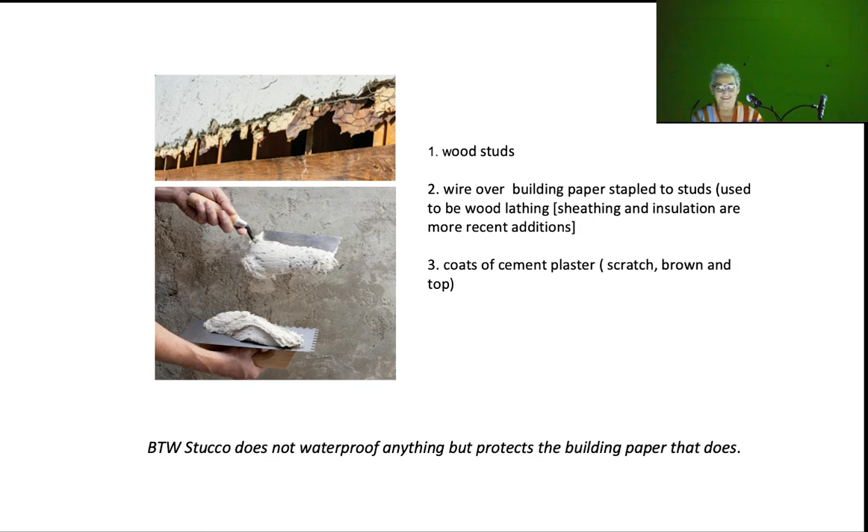Although we were very environmentally conscious and took flack for that, like most people back then, we were not linking building materials to climate change. We were thinking about sustainability in the broad sense, not carbon footprint. Truthfully, we took it for granted that a traditional material like stucco was okay, but we didn't really know.

So I am making up for that lack of research now because we can no longer ignore the impact of material choices. So here is a synopsis. Don't panic, it's not a treatise on stucco. So let's start with what's in it. Well, that I'll let you read. It's pretty exciting. You got it all?

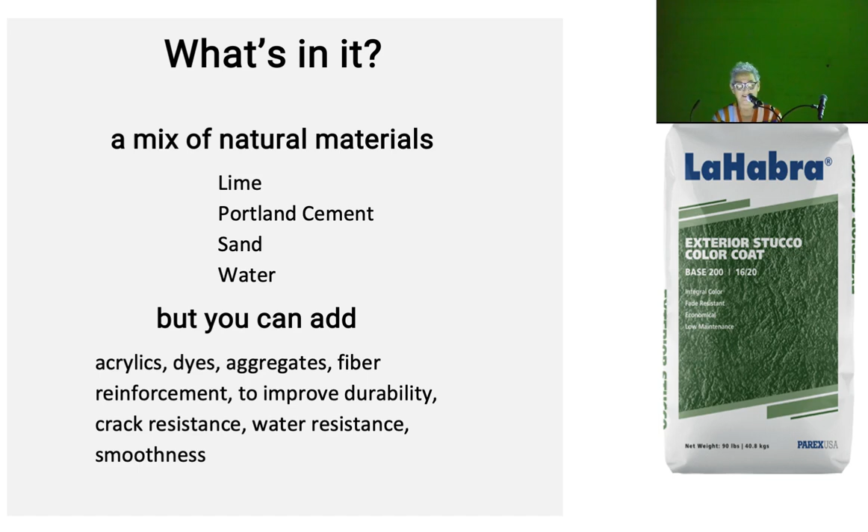I'm moving on. So what's the environmental scorecard? Because this is pretty important. It's climate appropriate. Now, don't forget, this is all coming from the thing that stucco kind of has a bad rap. I actually think stucco is okay. You know, stucco's our friend.

Breathable, high thermal mass, that's good for here. It's got a local manufacture, supply, and labor. It's easily repaired, resists solar degradation, and even has a fire resistance of 1 hour. It's got low embodied carbon relative to glass, vinyl, and metal, and is a very small percentage of the building's embodied carbon. It's disposable, reusable.

We need an environmental product declaration to know that. Is it healthy? We need an environmental product declaration to know that. In other words, we're at a point where we'll be learning more and more about materials, but we still don't know enough.

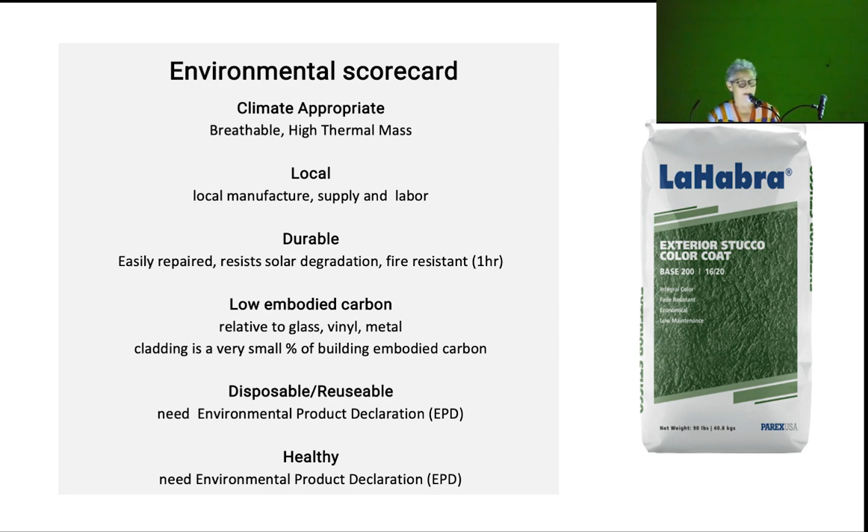And just if you want to know why we still use it so much, take a look at this chart. Stucco sand finish, and if you're into stucco like I am, there are different levels of finish, and they all cost something different, is $15 to $20 a square foot. If you work with any developer, they are very keen for you to stick to stucco whenever you can. If you look at buildings, you'll often see that there's some fancy material on the front and then there's stucco on the sides. It's this differential between even, let me get to cement board, $37 a square foot and 15 to 20 bucks a square foot.

So this would all make huge amount of sense, except that as a percentage of the construction cost, cladding is 8 to 12%. Mechanical electrical systems have been escalating. They're 25% of the construction cost. So we may be worrying about what we use on buildings without really understanding what their proportional impact is.

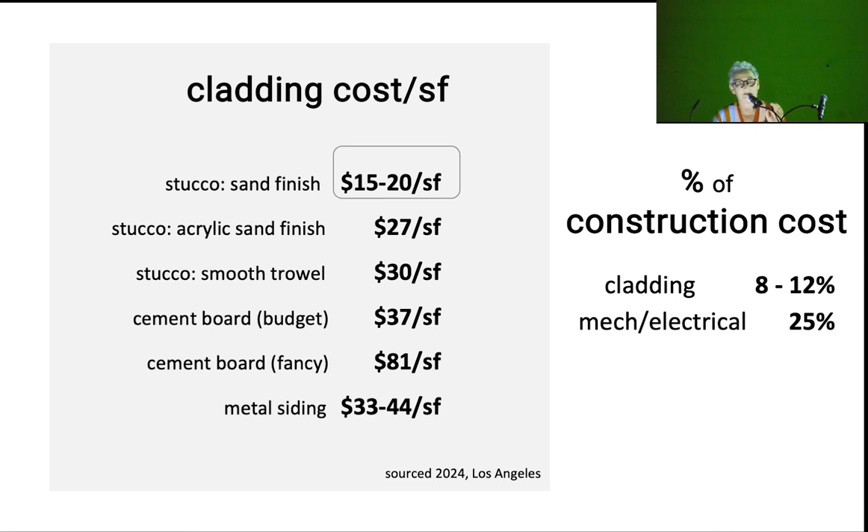These fantastic buildings hanging off the mountainside were by Neutra. I didn't know Beckett was involved in those platform houses, but he was. And then Charles Moore and Frank Gehry come along, and they take generic stucco-clad buildings in new directions.

Which brings me to the beginning of 40 plus years with stucco. As we mentioned, the work that came our way and that we gravitated to was for the most part very budget driven. We did small remodels, houses, affordable housing, and community projects. We ended up building a lot with stucco.

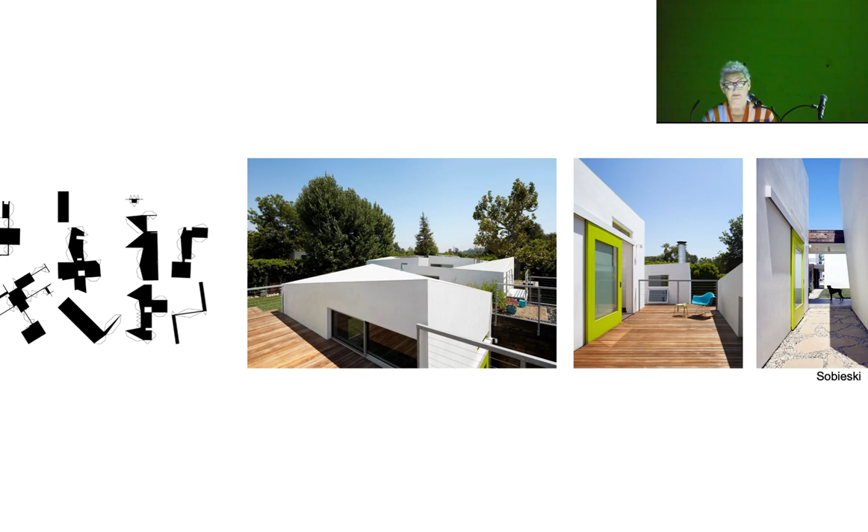So this one, the Sobieski house, is kind of a favorite one to think about with stucco because it applies the principle of thinness, as the diagram of the cutout box shows you, with the idea of plasticity. And in this case, although it was a budget project, we got to do the detail at the roof so that we could take the roof and connect it to the wall.

And then there's a whole group of buildings that started to look at how passive shade, which is something we care about because we worry about the performance of a building, could also create both amenity and shadow and pattern. So what you're looking at is the Arroyo, and these are clip-on metal screens. The Belmar Apartments...

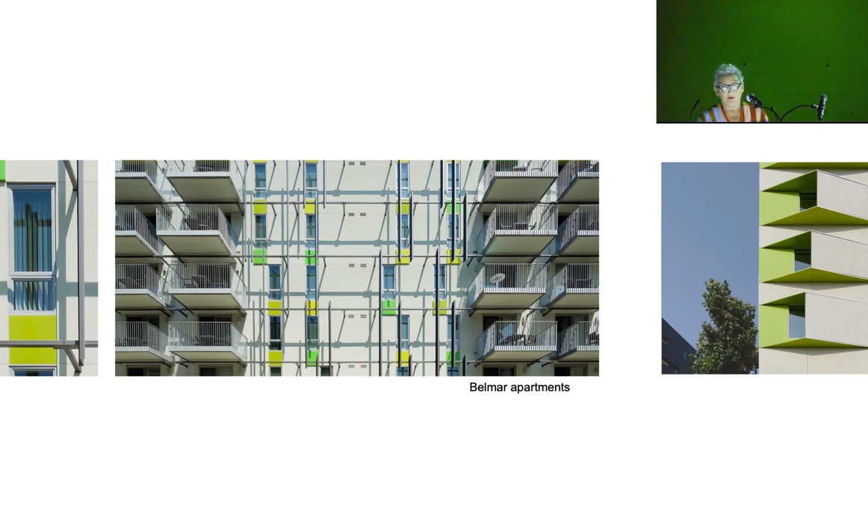Floor, where we started to combine the plasticity with the planes to get the things. I mean, it matters if you choose a material that has holes in it, as you see in the middle picture, the kind of shadow you get, versus one that has a solid panel, and what sort of shade you get from that.

So we'll move on to different topics, and the rest will be done by case study. So another material issue for us is building less. Reuse saves about 50 to 75% of embodied carbon over building new.

I guess just for a second, I want to say what in school you think of as constraints—like it's a cheap building material, or you can only do that much, or you have to worry about a detail or a joint—feels like a restriction on your freedom of thinking. And what happens when you get into the field is that's the stuff you get to actually play and reinvent with. It sounds counterintuitive, but sometimes thinking about how to do things cheaply and how they're built gives you more leverage to invent. So it's just a side note.

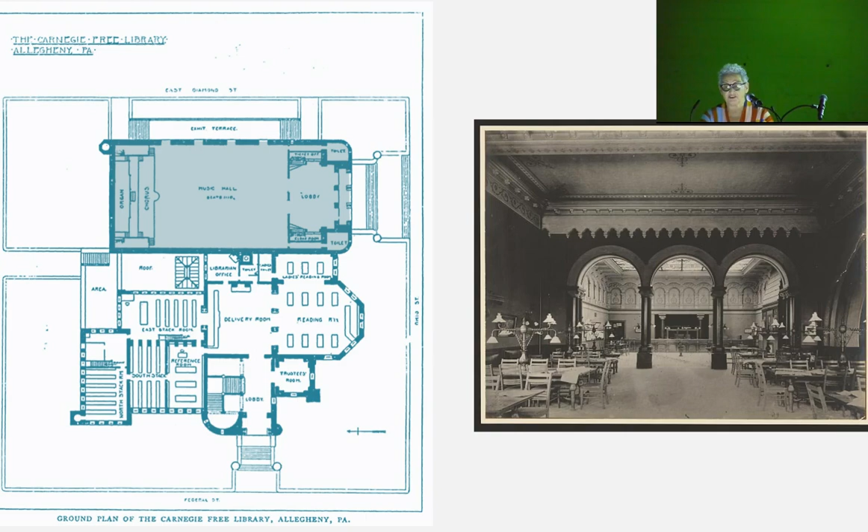It was a serious and formal building with silent reading rooms and precious books stored away from the public in structural stacks.

When you're dealing with historic buildings of this vintage, the real key space is where can you put the elevator, because there are so many levels in these old stone buildings. So that's where this project started—where do you put the elevator?

You can see the sort of blue square—I can reinforce that with a red dot if I do this right—was here. Then the gathering space: we needed to get the whole thing accessible. So we have the elevator and we have this space, but it's not at the same level as that space, which is a little section, and the front door is another level.

I won't go into it, but instead of thinking of accessibility as this issue of things that make the design exercise boring, it can actually give you opportunities to do more than you think. So instead of seeing it as, okay, how do I make a path of travel, you think: if I make an accessible space and make it big enough, I can actually make it a gathering space as well. So accessibility is a window of opportunity, not an interfering aspect of how you go about doing your job.

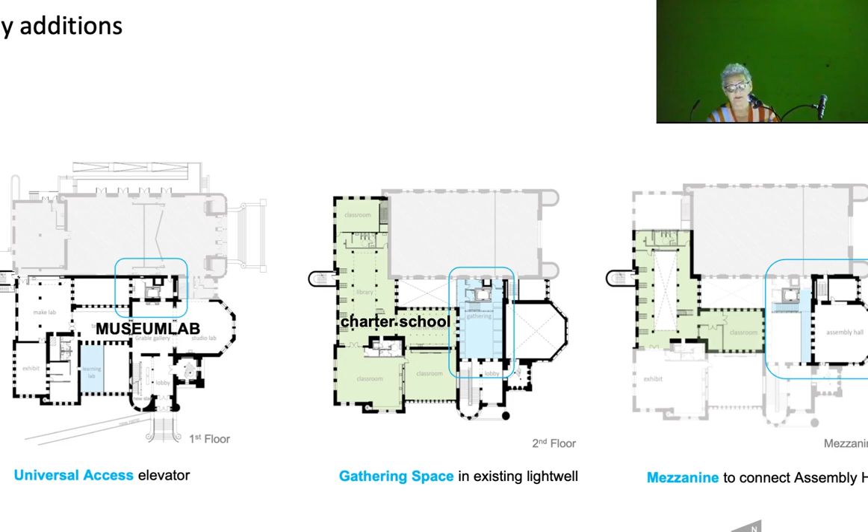Now, that doesn't mean you can't complain while you do it. I mean, that's fair. So we didn't add very much, but we added strategically, and the section kind of shows how we filled in there.

Although the outside of the building is listed on the National Register, the inside is not—too much was changed. Nevertheless, the hope was that somehow we could reveal some of the interior hidden by the 60s renovation. I mean, they did everything wrong that you could do for a masonry building, because once you encapsulate walls that are stone, the mortar crumbles.

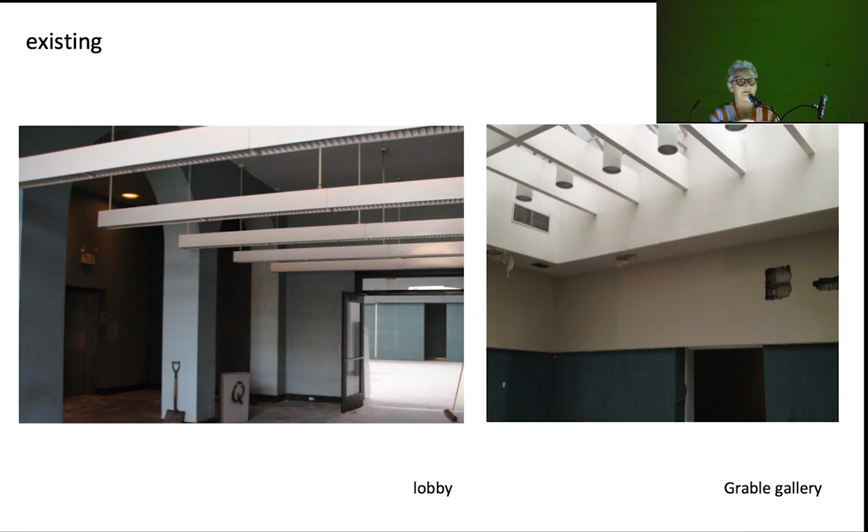That's a hint of what's coming next. This is what it could have looked like—well, some of what could have still been there.

But when we actually started to remove things, this is what we got to. Getting to a stable surface, given the crumbling mortar and sliced capitals, revealed structural underpinnings, load-bearing brick and steel armatures. In truth, we thought it was pretty cool, although we were scared because it was not what we had expected to get.

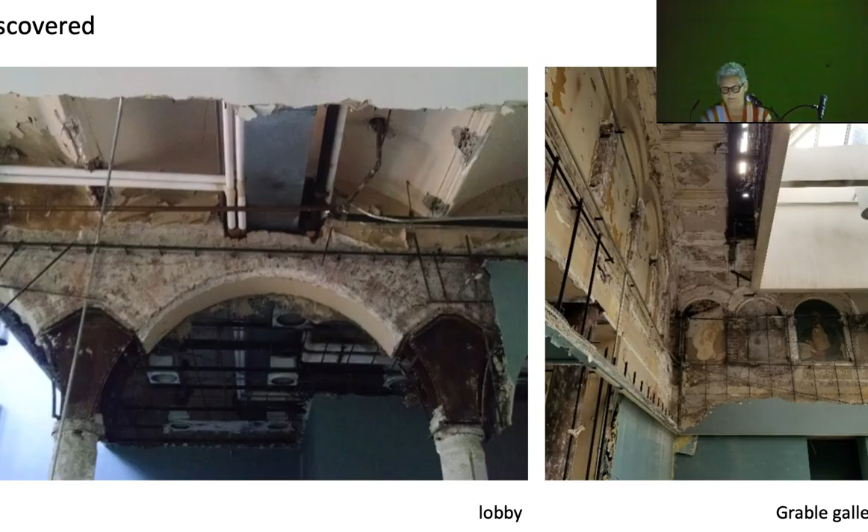Budget precluded reinstating the original. It was, however, a more fitting backdrop for a program that looked at how things are made, in a building endowed by a steel magnate, and it provided teens with an edgier and more interesting setting. So we embraced the idea of a beautiful ruin and ran with it.

It's not easy getting mechanical systems and electrical conduit in masonry buildings. The Freeland Buck firm did a ceiling installation which evokes the long-gone Tiffany skylight and conceals mechanical equipment and new pipes and conduits. That's the strategy, because if you've got a masonry building, you can't just cut open the wall and stick a conduit or duct in and patch it up. It's expensive work, not like a stucco-clad wood building where it's much easier.

Salvage materials were repurposed throughout. The ghost of the fireplace, this piece here, was made out of old library stack flooring, for example. There's lots of other stuff.

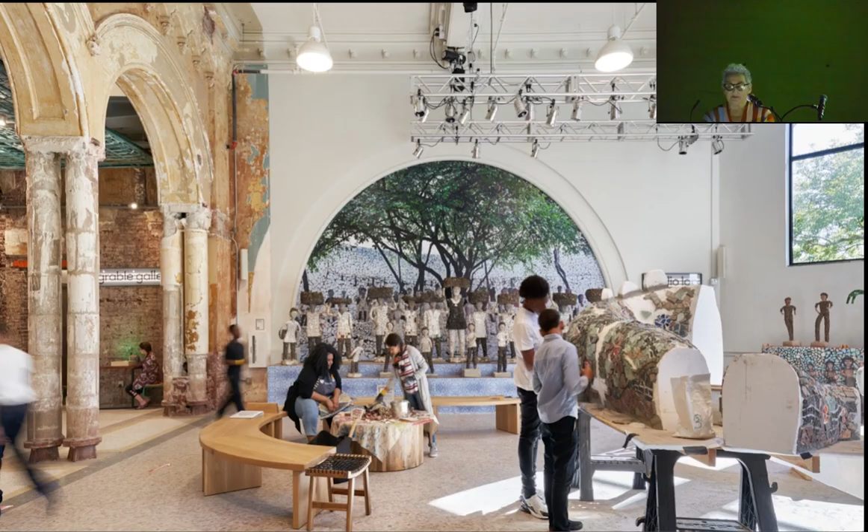We needed rules of engagement to pull all these varied conditions together. So we called things preservation areas and faux restoration areas. A preservation area in our mind was revealing all, but repairing distracting gashes - that's what you see on the left. Nothing falling off, it doesn't look dangerous, nothing poking out of the wall that can hurt children, that kind of stuff. The faux restoration was cleaning it up and painting it, done also to camouflage needed modern interventions like insulation, which was added to the inside face of the exterior walls to improve energy performance.

The cut line makes the decision-making explicit. By the cut line, I mean that line. And where that line went took days of arguments.

If we go upstairs, you can see where that new gathering space occupies the glass ceiling that was above the Tiffany ceiling that was long gone. The lobby lounge - for some reason they had put toilets in that area and covered up all the exterior glass. If you look up from below where the Freeland Buck ceiling now is, up to what was the glass roof of that space.

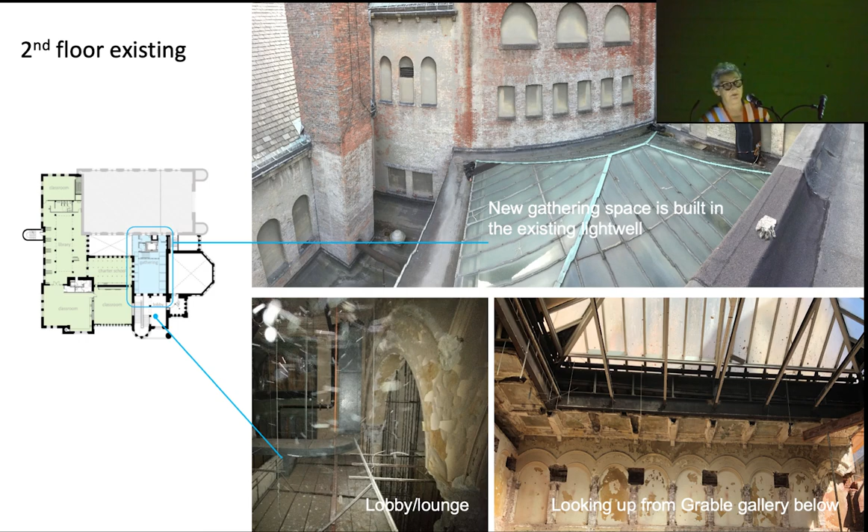Talking about reusing stuff, those chairs came out of the city library repository. Nobody wanted those Panton chairs, so we took them.

As you move into that gathering space, on the left is the entry to the charter school. To keep the connection between daylight coming through, you can see the kids' feet over the glass floor that partially illuminates the floor below - one of the classrooms in the charter school.

Heading back out, here's the issue with places for community - you have the problem here. There's nothing worse than a stack of chairs stuck in a space, because what it does, it says you as a human are an imposition here, what we really need to take care of is the chairs. So we needed a way where the chairs felt like second-class citizens and the people were the first-class citizens. So we got some really great hooks from Home Depot with orange rubber edges, and those hooks hang on that wall.

And looking back through, again using light to create edges and I think add optimism. There's a whole story about how this last piece on the way out of the building got restored, but I'll save you.

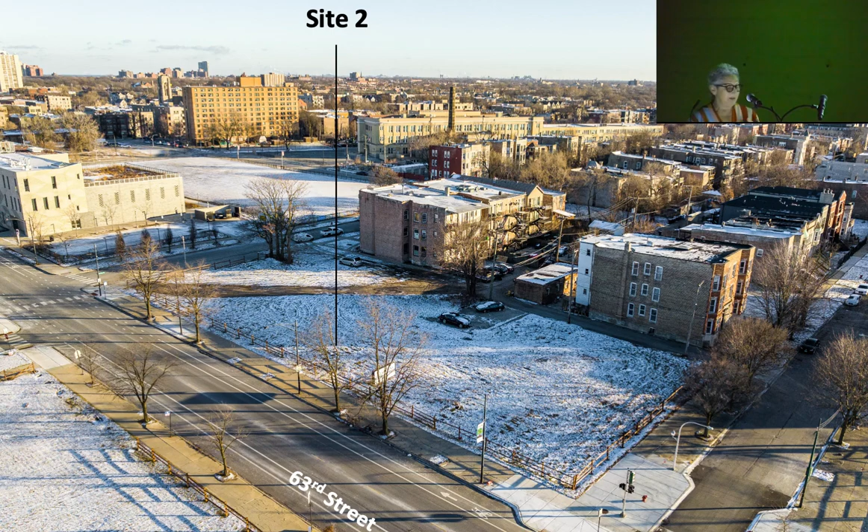They speak volumes about how forgotten this neighborhood had become from its pre-war heyday as a hub for the Black community. The city was looking for a catalyst proposal on lot 1 or 2. We chose 2, and I can make it change from winter to summer by the push of a button. Voila. And this is what we did.

What was great was we were working with developers who encouraged us to challenge the conventions, and we initiated both programmatic and spatial innovations.

So let's talk about the program first. This is the first affordable housing development model that actually delivered both for-sale and rental housing on a commercial infill development site. Incorporating for-sale housing in these deals was on the city wish list as it supports wealth building. The secret was configuring it as a separate building. Sounds silly, but if you're a bank, apparently it's not silly. That simplified the making of the deal, and it also contributed to our being able to think about a typical commercial site differently.

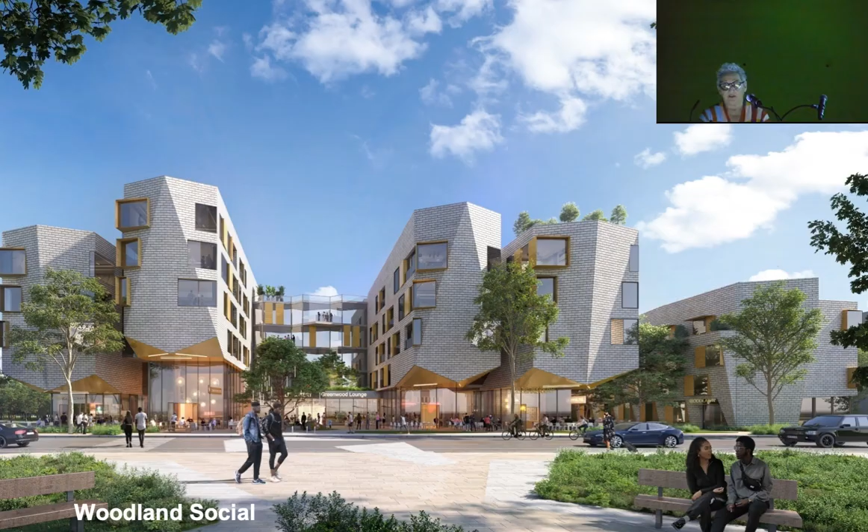Which brings us to form and massing. The approach was new for Chicago. It was a logical extension of what we had been doing in LA. Think the Arroyo and the Park projects that I showed you earlier. It evolved from a mindset of thinking about design and space making as creating mutual benefit for both residents and the neighborhood.

It replaces conventional commercial street wall massing with a riff on the residential grain. It offers a soft-scale transition between neighborhood and commercial street, supports the incorporation of for-sale housing, that was our clever trick, brings sunlight through the site to the street on a north-facing lot, which is a huge deal in Chicago, creates public space that enhances desirability for restaurant tenants, gives more green to the street, reduces dependency on continuous active retail to animate commercial streets, and provides a better aspect for apartment townhouses.

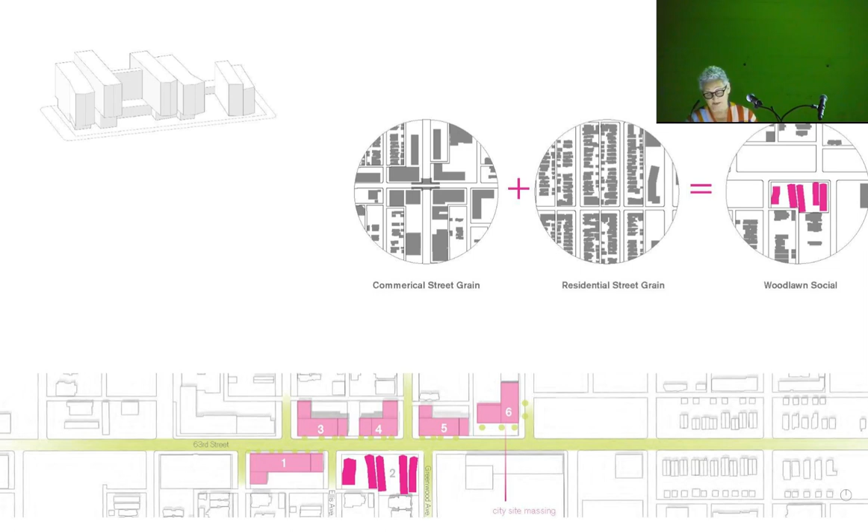I feel like a salesman, sorry about that. I extracted stuff from the report we gave them.

We were also asked what else could be done to catalyze development on 63rd Street. So you can see we're on the south side of the street, and there was lot 4 which was a bit smaller. We suggested the city develop parcel 4 with a small park and cultural uses to create more critical mass to attract visitors to the neighborhood after, say, a visit to the Obama Center. It could include a shared parking structure above to serve stores and visitors. If the garage was flat plate, it could change to apartments down the road.

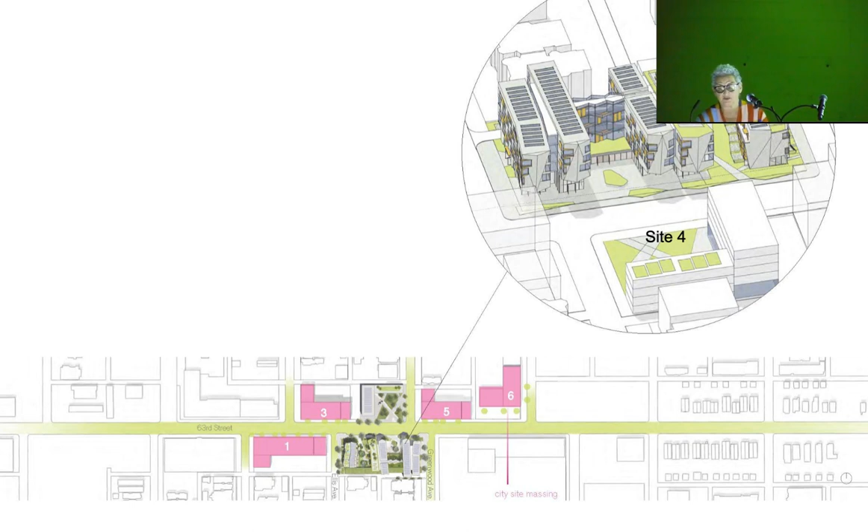This view shows how the for-sale townhouses create a soft transition between residential cross streets and the commercial street.

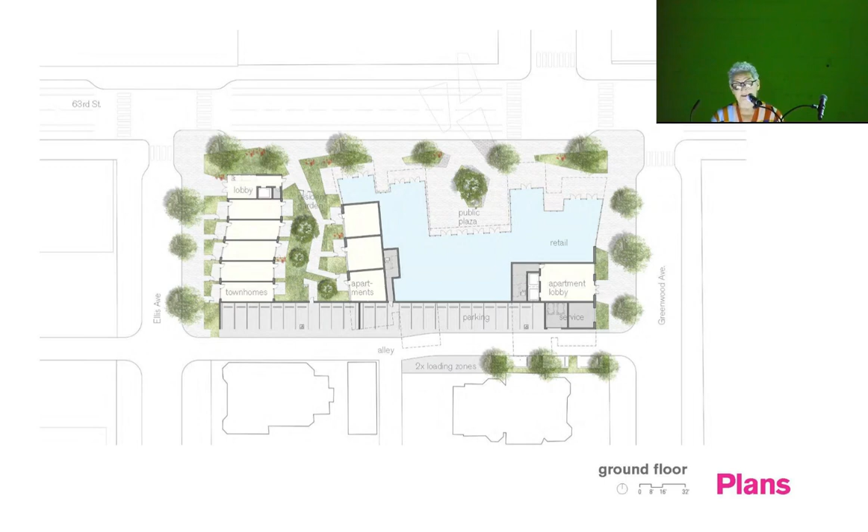And I know students don't like plans, but us old schoolers love plans, so I'm putting them there for the old schoolers who join me here today. It has a good plan, this building. And some clever devices. By pulling in the hallway at the end, you get the volume to look thinner, and you get a more elegant proportioning of the pieces.

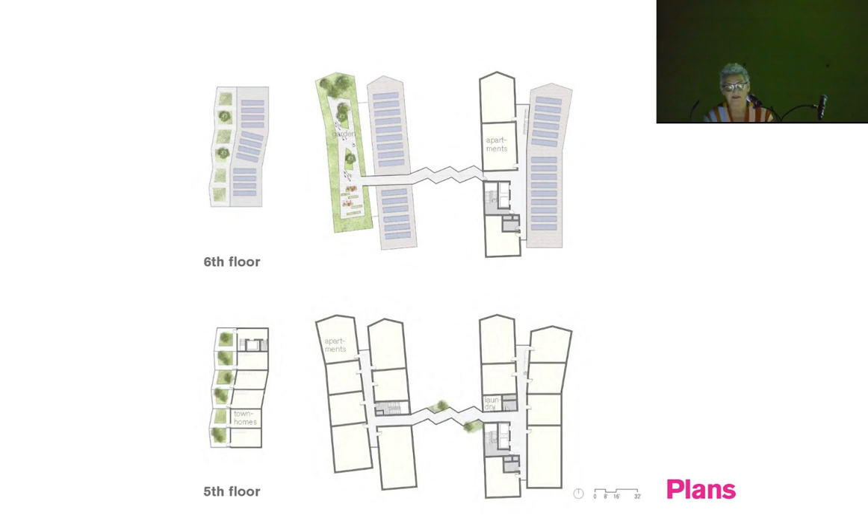And then finally, the core space around which we hope restaurants will come together. It's still pretty tough down there. The formula isn't quite working. The money available to do these kinds of projects and the aspirations for the project don't quite jive. And we're at that stage, trying to work out what's really important. I'll get back to this issue: value engineering, as we call it at the office, or meeting a budget, actually makes a project stronger. I'm not exactly sure what's going to change on this one, but something will change. But it will be better.

So this is a whole lot of full disclosure that should be cut out of the recording if people are going to listen to this later.

Working in community buildings and affordable housing, the issue of welcome is a big deal. Social equity and inclusion is cued by making people feel welcome, and there are ways we can do that. This project, the student precinct and student pavilion at Melbourne University, is a good example of the thinking we've used to approach that issue.

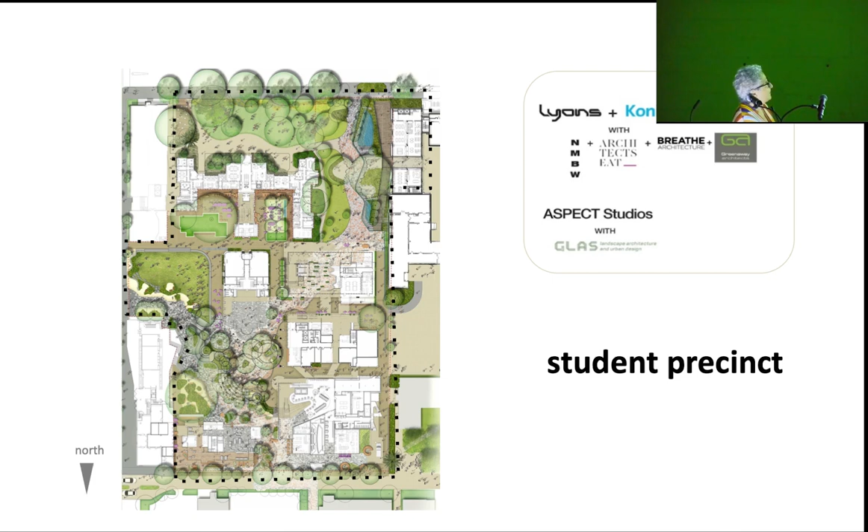So this is the student precinct. This is the unifying landscape that rolls through the site. It foregrounds the contribution of the Wurundjeri clan, the traditional owners of the land, by making the pre-colonial topography visible. It reflects a general consciousness raising and steps toward reconciliation with Indigenous peoples that's happening in Australia, and increasingly the case here.

I'm kind of shocked to hear the traditional owners of the land recognized in your speech, Mariana, because I've never heard that on campus before—maybe I haven't been on campus for a while. But the issue is important, and normalizing the role of Indigenous peoples in society is really something I appreciate happening. In Australia, every event used to start with God Save the Queen, then another song equally bad called Advance Australia Fair. Now every event begins with a welcome to country that highlights the cultural significance of the surrounding area to a particular Aboriginal clan or language group, rightly recognised and honoured as traditional owners of the land.

Instead of building everything new, our team chose to keep as much as we could and reuse it, then decided what parts of the program would go where. This is how it played out—you can see there were 2 new buildings, and partly because we were a long way away, meaning here.

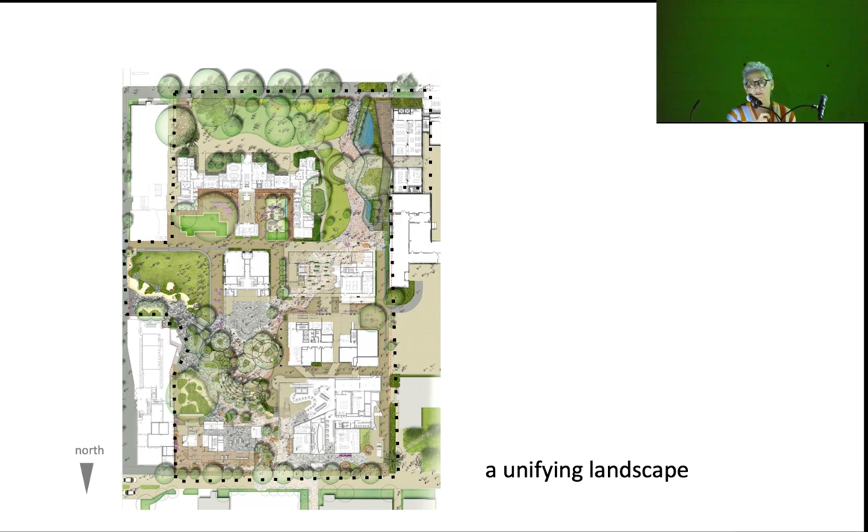So what I didn't tell you about the diversity thing is, good old Lyons were the executive, but the expectation was that as we divided the work up among the firms, each firm would design, document, and be responsible for the construction observation of their building parts. It was a very collegial effort. In the master planning stuff, it was like studio again—you could talk to other people without feeling you were treading on toes. We were all looking for ways to make our buildings better, knowing we were on safe territory. No one told us what to do with our building, and we didn't tell others what to do with theirs. We did look for opportunities to make intersections stronger. It was fun.

So this is sort of how it played out. I think the other reason we got this area—I should have practiced, I admit, before I came.

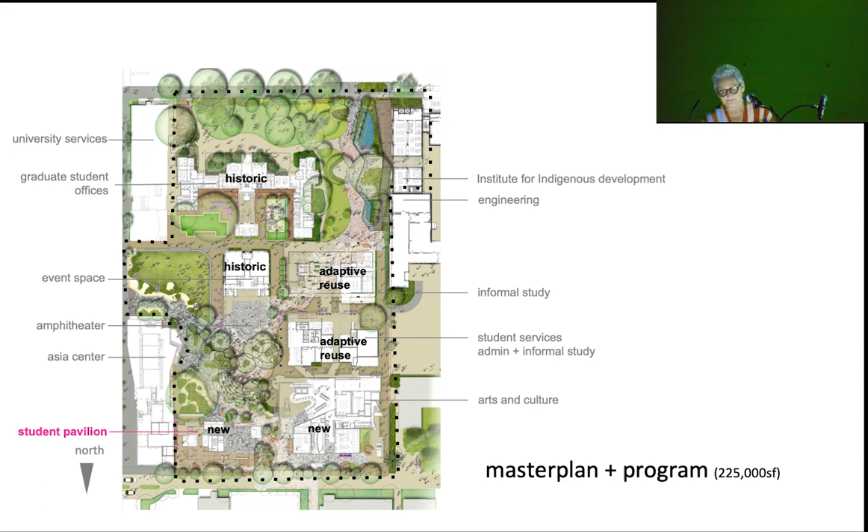Now, we knew we'd scored with the students when they started calling the building the PAV. You'd think it's a contraction of the word pavilion, but in Australia, a PAV is a very well-known dessert—crispy meringue with whipped cream and fruit on top.

The Student Pavilion program evolved through our interactive programming as a master planning team, and it came our way, I think, because it's the least institutional of the precinct programs. We had a reputation for not liking institutional things—it's the informal neighborhood building. It has a food hall at the bottom, a retreat rooftop for events, which feels a little bit like if you had a very rich aunt and she let you have her country house for the day. That's it.

A study space and a recreational library where study is not allowed. Earlier this evening, before this opened to the public, we talked about soft rooms where people went—what's the polite term, is it LSD? Can you say LSD nowadays without getting into trouble? So where you'd go to drop some acid, okay. Back in the day, the Rowden White Library had all of the music collection, and you could go sit in a chair with your fat headphones on and get them to put on whatever album you liked, and whatever enhancements you took with you made for a really enjoyable afternoon. So I had a very sentimental attachment to the Rowden White Library.

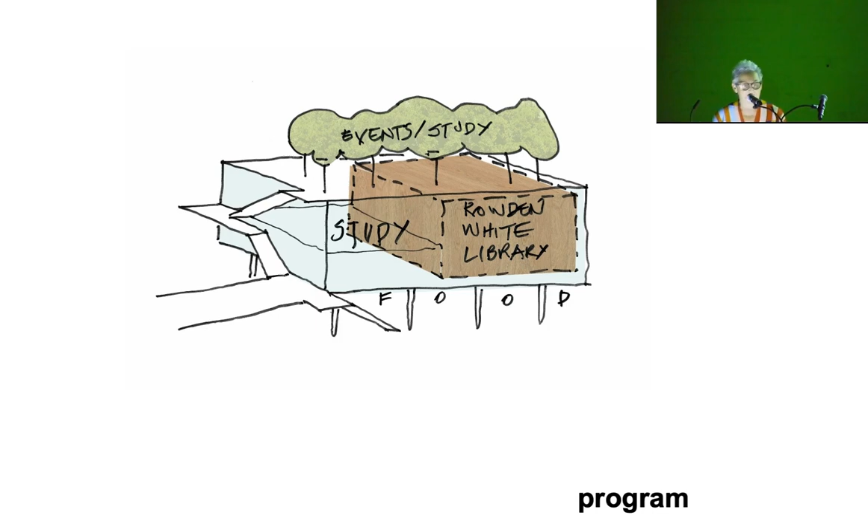So that sandwich of uses is held together with a structure of expressive columns. There's a lot of brutalist concrete work on that campus, and we didn't have a feeling about whether that was good or bad—this was an opportunity for us to embed some of that history in this new building.

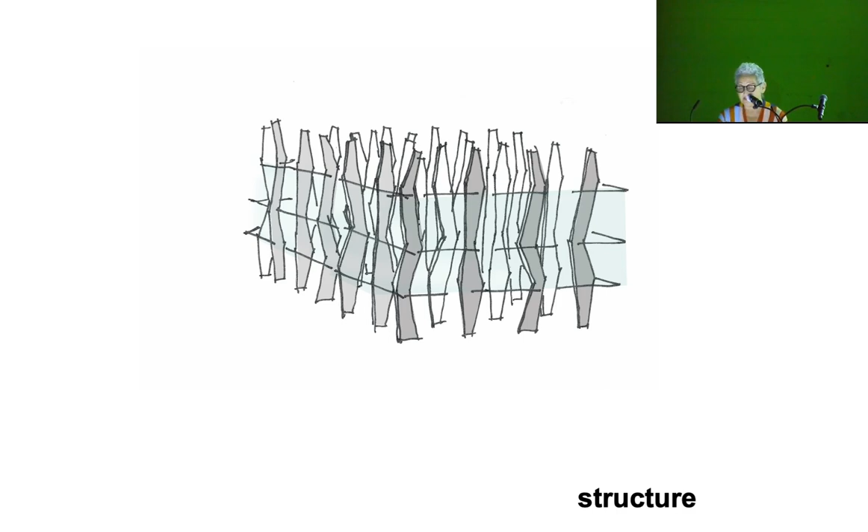And it also talks about this issue—we talk about welcome. Welcome is also about letting people be in control of the situation. So the idea of discovery is very important for us. A structural system that revealed itself differently in one direction versus another was something you would discover as you moved around the building. So it's assembled, as you can see, in this sort of sequence.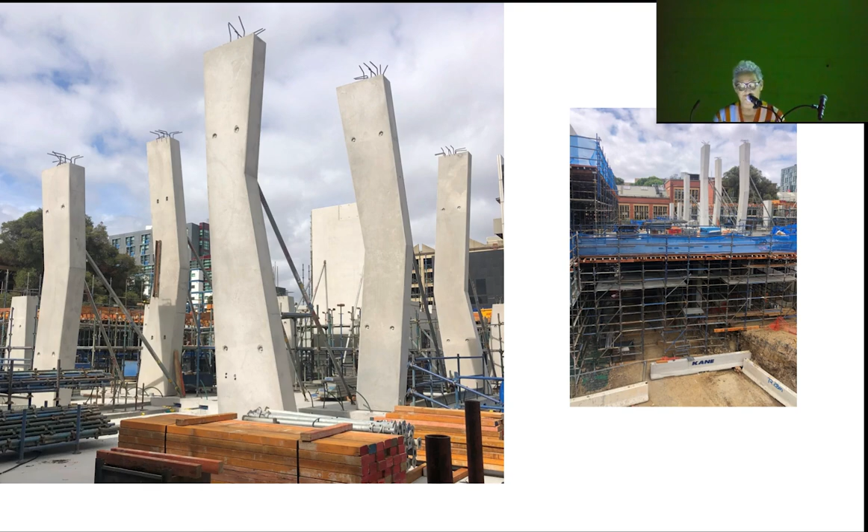This is pretty depressing. So you need to find a way of getting people to have outdoor spaces or indoor spaces that have sectional quality without making it look like you're trying to put them in prison. And it's tricky.

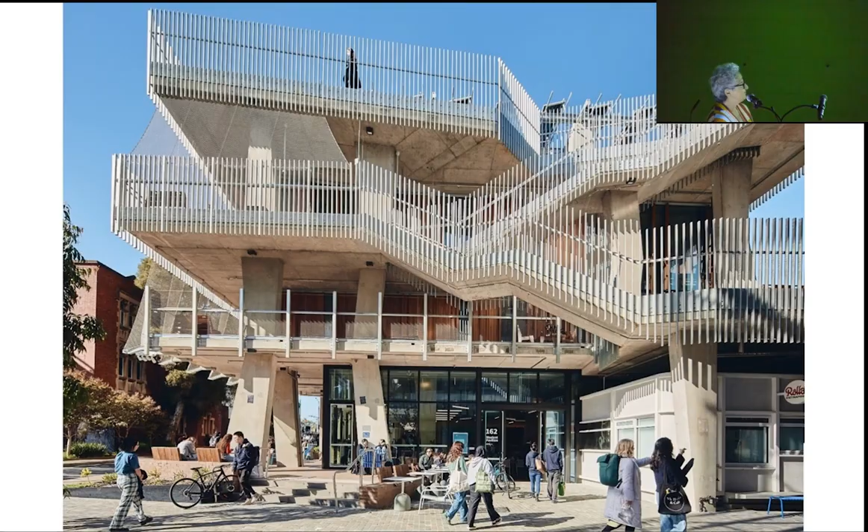Again, another practicality that sort of begets more need for ingenuity. So we made it an active edge. It's one of the few active edges coming into campus. And then we did this ridiculously big, humongous welcoming stair, which meant that everyone could use all of it.

Inside, that's the dining commons, and you can see sustainability again played a part in the way the expression of the building is organized. Don't forget the sun's coming from the north, not the south. Remember that, guys.

Mixed mode for where we could open up the building for when the weather was good, and conditioned space for where people were going to be sort of studying more and needed more comfortable thermal conditions.

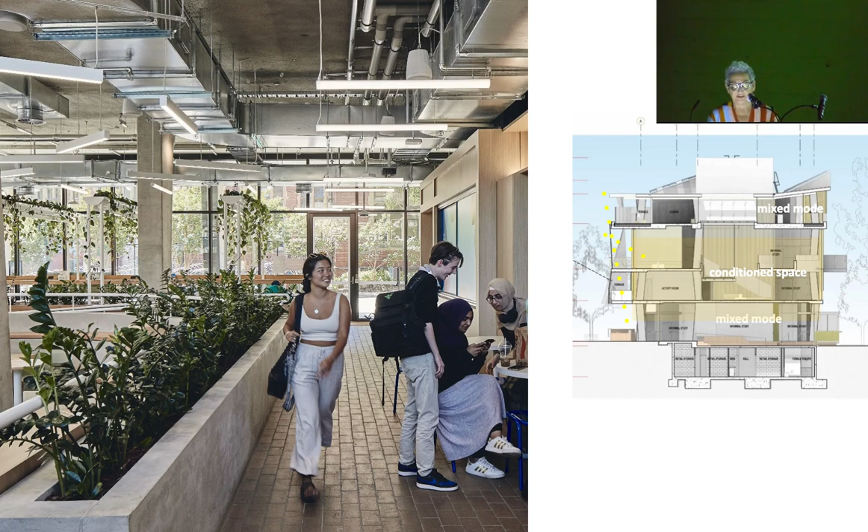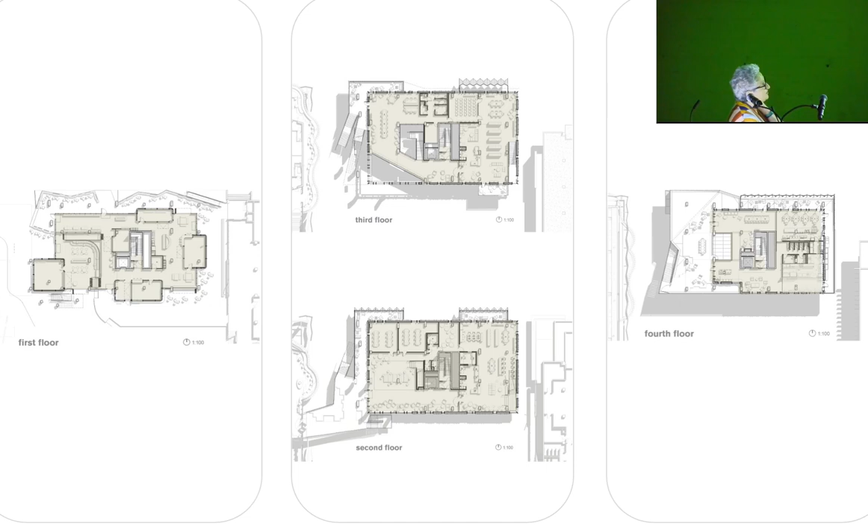Again, for plans, for those who love them. And you can see the way the middle floors connect here, and then there's a sort of central exit stair here. So the other thing that stair gave us was a bigger footprint inside the building, while making the space between here feel bigger, because we needed 2 exit stairs, and one is that outside stair, and then this is the second one. You can see which steals sort of the minimum of space within the building.

So when I said to make people feel welcome, you want to make them feel in control, that means you need to provide choice. So we were very big into trying to find opportunities where there were big spaces, smaller spaces, different kinds of conditions where you could hang out.

The other part that I'm not going to dwell on, but we need to talk about, is gender equal toilets and all that kind of stuff, which are taken quite seriously and distributed around the building.